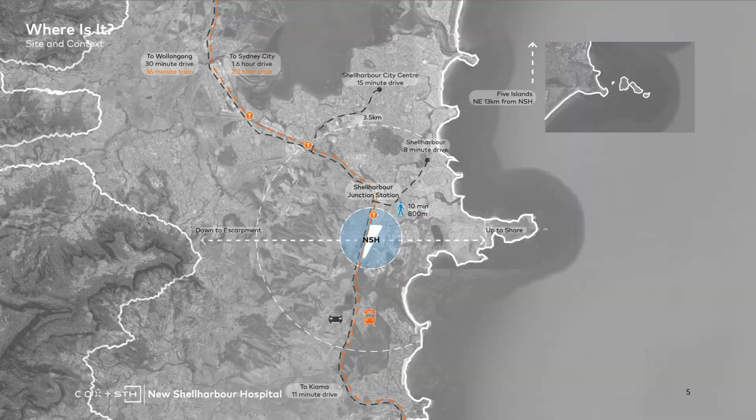So when we started the project, there was an existing project vision statement, which was: from the escarpment to the sea, the new Shellharbour Hospital will be a safe, sustainable and inclusive place to connect the community to health services, enriching the lives of people in our region. So with the site that we've been given and that kind of a vision, what a challenge to be set. Just some very quick things about the site.

So for all the architects in the room, you're probably pretty familiar with these design principles. These are best practice and inherent in any health project. Hospitals, in our opinion, need to function well, be flexible, have really good connectivity, be safe for staff and patients. And promoting physical, emotional, and spiritual care through a therapeutic environment is paramount. But finally, connection to country and of the place should really be embedded in the design.

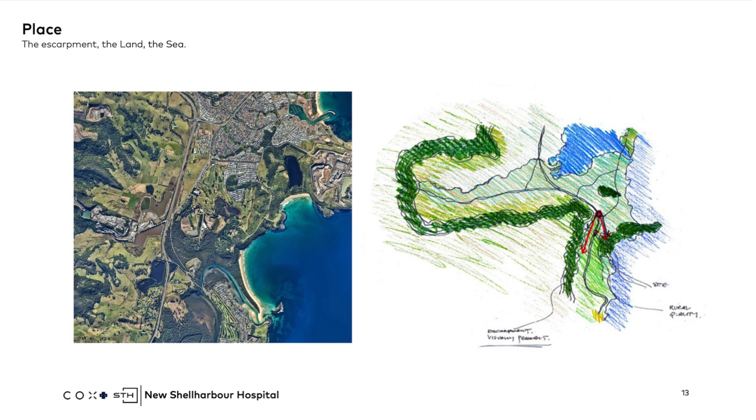And having been given a brief, as with any architectural project, you have to start by looking at the place. So this was our first task before engaging with the connecting with country process. So as we mentioned before, the place is dominated by the escarpment, the land, the sea, and the interaction between all those elements and a former agricultural use. The other key thing that you take away from this landscape is its magnificent horizontality. So be it by the sea and that lovely blue flat horizon, or the escarpment itself. And these are really front of mind in our imagination as we're working through the building.

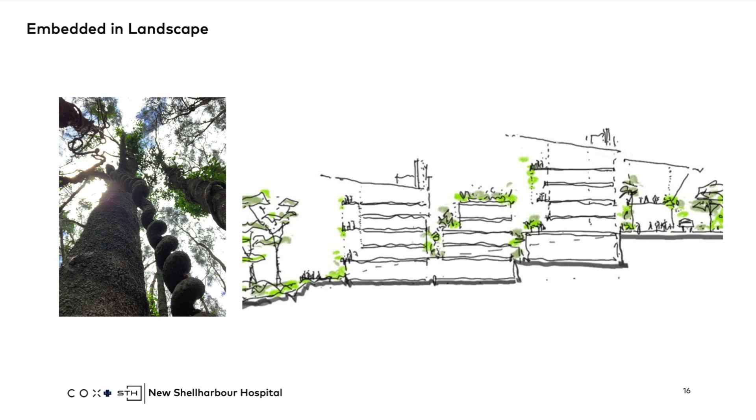And I guess important in any hospital is the design of the inpatient unit, and this was of key importance in both function and form. So, it's interesting. You've seen a lot of the typology of the urban. We call it the urban design, the linear design, or half an H wing. So we did explore that because Health Infrastructure wanted us to explore that, and then we looked at the more organic approach. And what we landed on was the more organic design because ultimately it had thinner wings with more beds per floor and hence more access to daylight. It had better views to the escarpment with 71% uninterrupted views, no internal views to other beds, and it essentially met the brief of the rooms with a view.

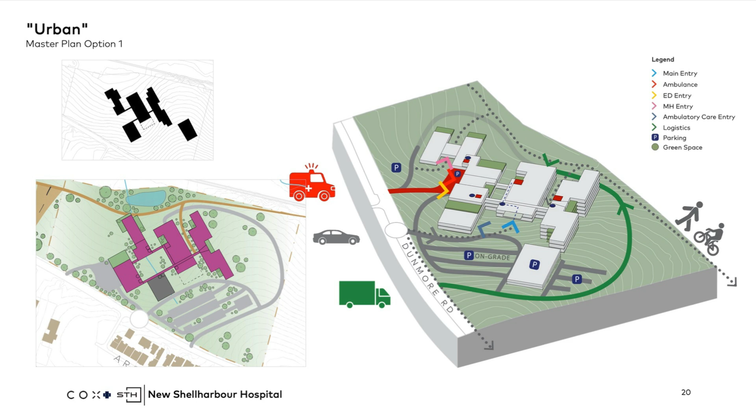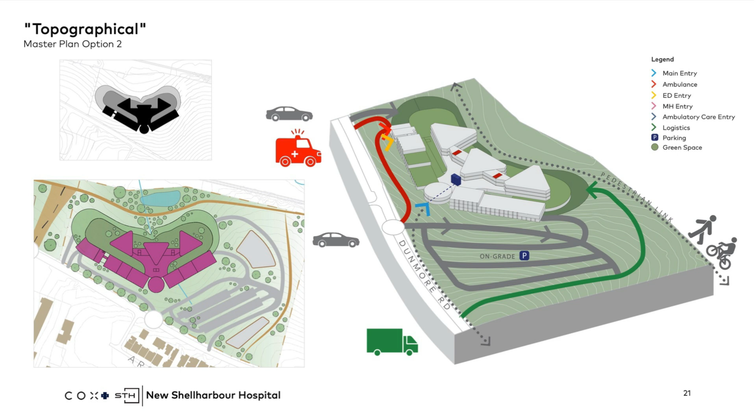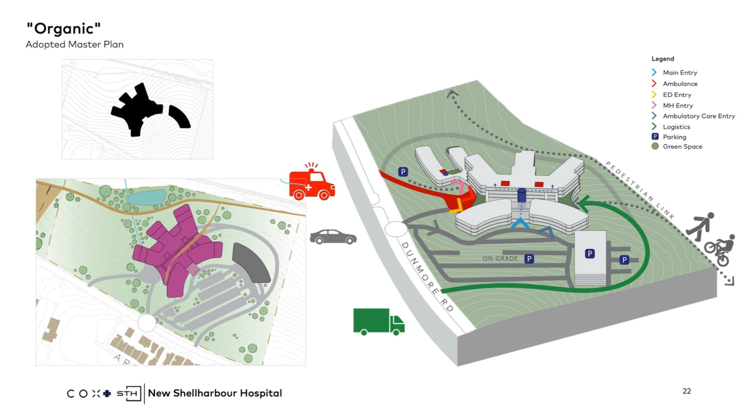Okay, so this pavilion design, again, fortuitous. We've seen a lot of people talk about this already. So we did about 30 concepts for the master plan, and we narrowed it down to about 3. And the first one was the urban form, which was very linear, fairly familiar in urban hospital designs, but very agnostic of the context and a lot of internalised views. So then the second one was the topographical. So we went to the complete extreme and thought, why don't we put a very large singular clinical podium that created a beautiful large green terrace with some exploration of triangular wards on top. What we found is that it had significant travel distances, a high facade to floor ratio, and was essentially too expensive. So what we landed on was organic, which is our adopted master plan.

And the beauty of this one was we did the 8.4 by 8.4 grid. We've got standardisation and universality, but it's a more compact building form. It optimised all the travel distances for the users. We aimed for a 60-metre radius from front of house to each department, and it has fantastic improved views. It engages with the landscape and slope of the land. And we had a really good connection to a mental health precinct to the left. And we really tried to use the slope of the land as much as we can. So having gone through a master planning and massing phase, the connecting with country process then started in earnest.

And we came into that process really with some core principles or really aspirations. So to connect with natural contours, to celebrate watercourses, views, make connections to landscape at multiple levels. So these are themes that we've heard a few times, which is good, means we sort of got some part of it right. And also to integrate spaces that make reference to the original markers on or in the vicinity of the site with historical significance to country.

I want to make a special mention of Yerrabingin, who obviously are not presenting with us, but who coordinated the connecting with country process. This is one of their documents, which is a sort of everything on one page piece that captures all of those conversations. So in particular, local stories, local planting, the importance of journeys through the site, and the 5 blobs. And I want to get to the 5 blobs, which is a very important local story. And it's the story of the 5 islands.

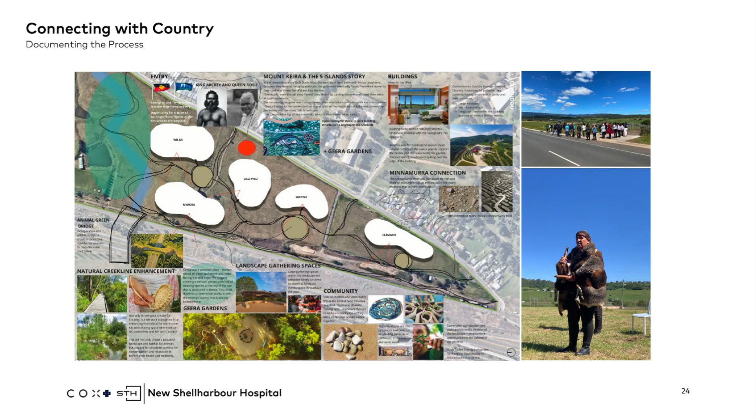So the story goes, and this is a paraphrasing, but one we've used before, so I feel like we've got authority to use it. That Ullabullawu, the West Wind, and his 6 daughters, Mimosa, Wilga, Lillipilli, Wattle, Clematis, and Geera, lived atop a mountain surrounded by an ever-changing meeting point of sea, land, and sky. One by one, the daughters misbehaved and were cast out to sea, where they became islands.

What a dad. The youngest daughter, Geera, then didn't have anyone to play with, so sat longingly looking out to sea at her sisters. She eventually turned to stone and became the escarpment that is now Mount Keira, and that is the 5 Islands dreaming story. Actually a happy story. It's a story about the sisters, not the dad.

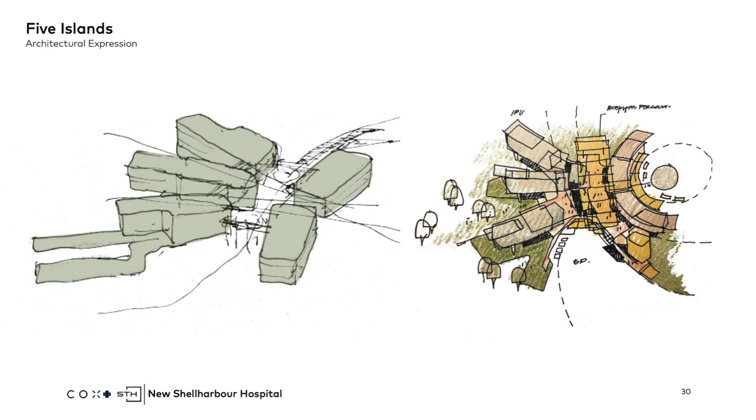Progressively, we worked up the idea, and a lot of this is about, and Brad mentioned, teasing the mass apart to create as many connections out towards views and land that we can. So there's a massing sketch which then evolved into an architectural sketch. The key thing I want to point out in this sketch is the idea of the central meeting space, the covered welcome lounge. But 5 Islands didn't stop there. It wasn't just 5 building masses. It was also a landscape concept.

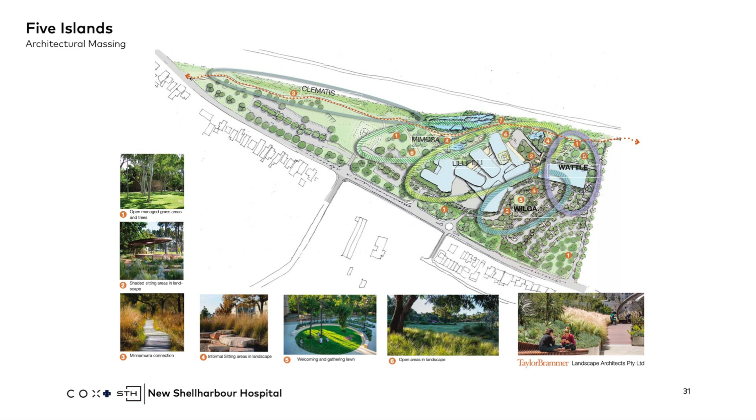So in this you can see Clematis, Wattle, Lillipilli, Wilga, and Mimosa as 5 separate climatic zones that might be appropriately allocated across the site. And thanks to Taylor Brammer as well for these. So I wanted to show you an evolution of sketches. So this is an early sketch of all those elements coming together on the site. I will say at this point that the 5th island did get value managed out. Yeah. Which, some might say is a limiting part of the design, but we do have a pre-prepared interior design scheme and a few calls ready to receive the 5th island.

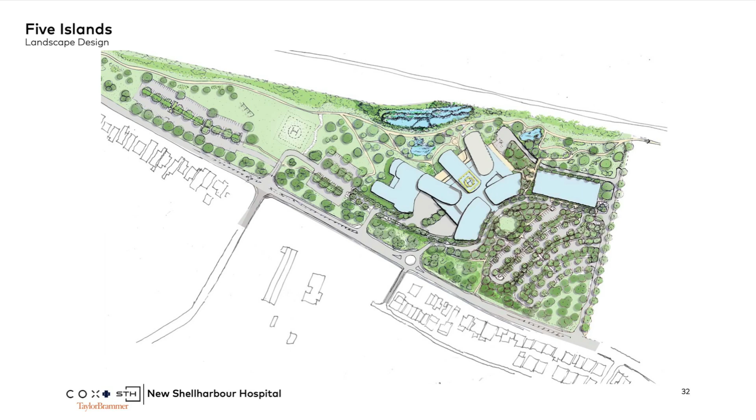And this is our SSDA approved scheme. And again, the things that I really want to point out to you are the Gira garden at the very top of the hill. So we use that high point that we mentioned. Now what you're seeing is a truncation of the larger triangle. So it's the middle section of the site, but still at the very top of the site, we have a Gira garden. A slight digression, it's also in a bushfire zone. So again, all these constraints that you have on picking sites in a rural context.

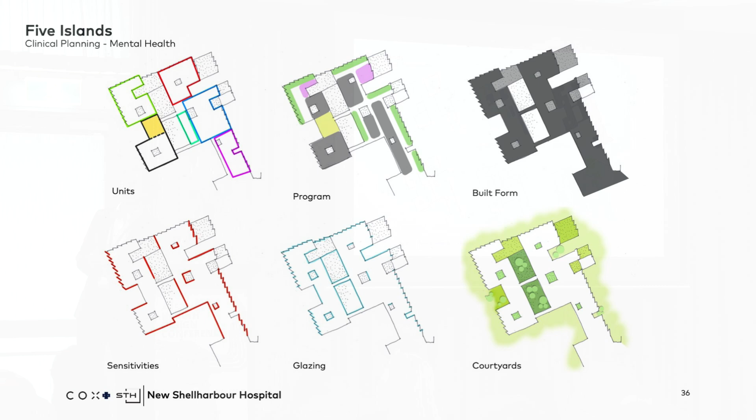And then there's a series of sensitivities between them to try and obstruct views, but also create views out towards landscape. So in the final diagram, every single one of those courtyards has either got a view out towards landscape or to a courtyard.

And I think it wasn't really clear on the block and stack, and it's hard to explain, but essentially because we've followed the site and cut into the site, every level, every theatre has a view, ED has a view, the inpatient units all have gardens and elevated terraces, and mental health all have views and they can get out into the... So the intention is that everyone can get out and touch the landscape.

This will probably be the last presentation where we're looking just at the building, because when it gets built, we'll have photographs of the views from the building.

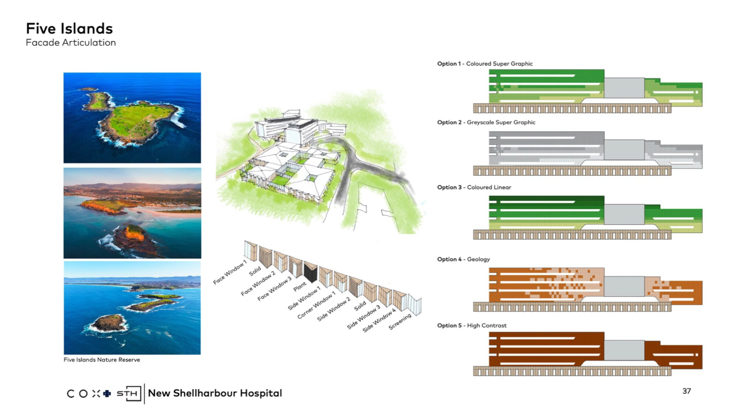So, in terms of how the 5 Islands then became a facade narrative, we did a series of studies of effectively from the water line all the way to the canopy line. And you can see those studies on the right-hand side, different ways of abstracting the idea. We took these studies back to our Indigenous working group and workshopped them and landed effectively on the version on the very top.

As you know, hospitals, particularly the hot floor plates, those lower 2 that Melina mentioned, have got lots of different openings, plant rooms, you name it. So we developed a sort of suite of facade expression to deal with each of those conditions that you can see in that kind of angled diagram. And that's how it ended up being articulated on the form.

One of the things I want to point out here, if you look at the elevation on the bottom, is how we go from 2 stories on the northern part of the site up to 7 as we go down the hill. So really embedding a curved building into the landscape.

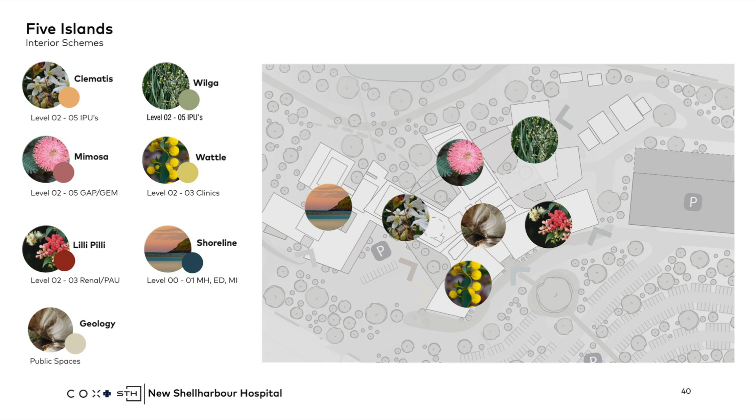So thanks, Tracy. The 5 Islands also became interior schemes. So we have 5 individual inpatient units, and then, like any hospital, a need for a base palette. So we had the geology and shoreline palettes to go. We then allocated those. There's a colour study that sits behind it, but we allocated them according to the appropriate uses. So, for example, Lilli Pilli being an active colour palette in the ambulatory care centre.

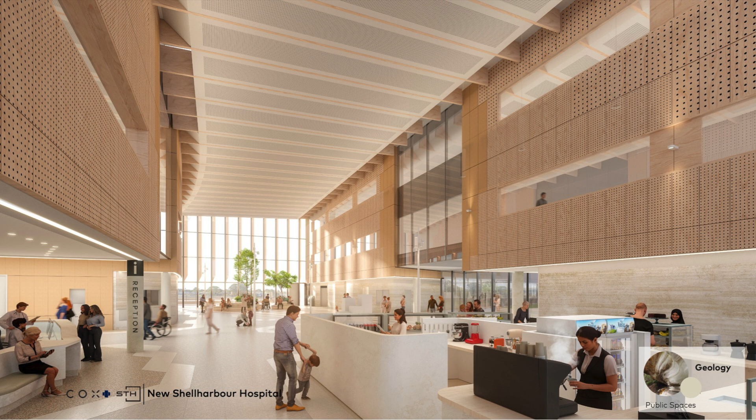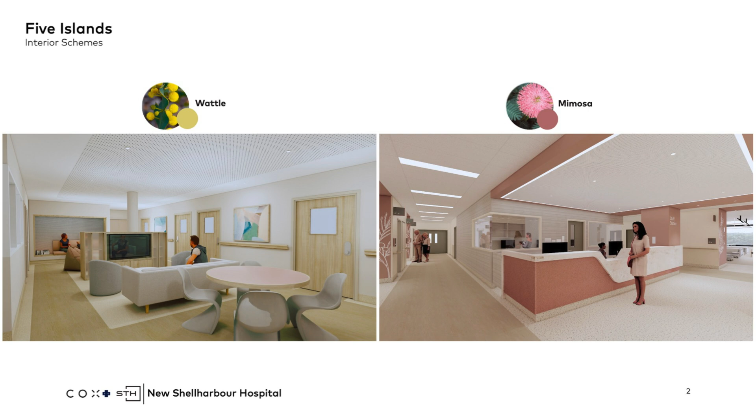This is that welcome lounge. So it's views out towards the east and the west. And as you enter on the left-hand side, past reception, you can see through the built form out towards the escarpment. And then just some simple examples of how those colour schemes are applied in inpatient units on the right and mental health lounges on the left.

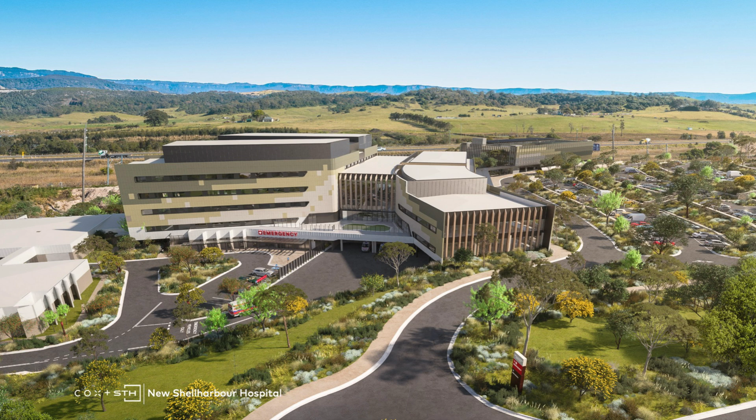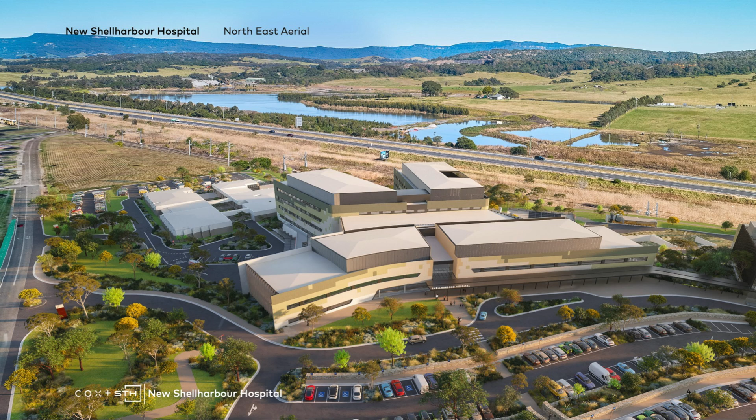And swinging that aerial view around toward the north, this is the ambulatory care building across the front with the arrival and drop-off sequence with the inpatient units behind. It was really important to us that the arrival feel like a regional hospital, not like an urban hospital. So very much dominated by landscape. And this is the arrival across that sublime curve across the front. You can see a multi-story car park in the background.

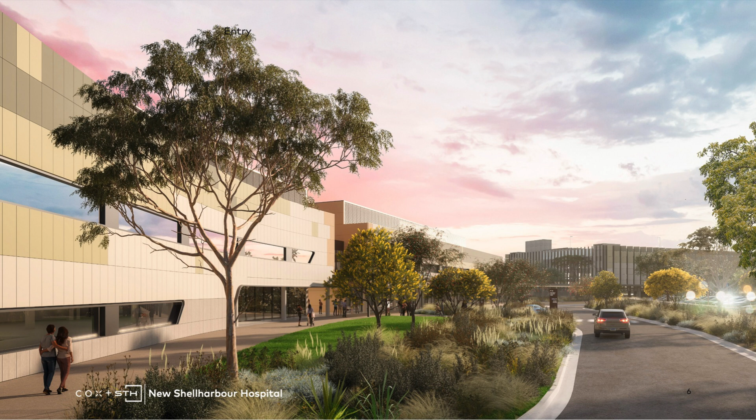If you can wrap up your presentation for the Q&A. Okay, noted.

I think it's important. Again, you can see that we did have separate entries for ED at the lower level, which you saw there. So we've got that really good separation of public arrivals. And this is the pretty significant building from the south, with the beautiful landscape gardens that hopefully we can afford.